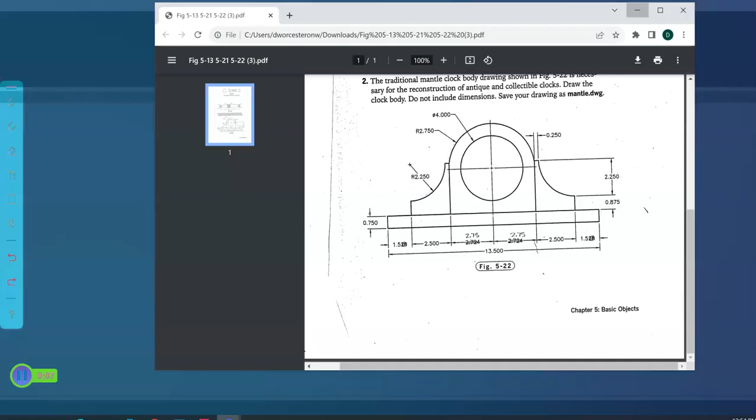Okay, for this drawing, we're going to be doing the 522 clock, and this is what your drawing looks like. So right here is the drawing of the clock. I did make a couple modifications on this drawing.

I've made this into 2.75 inches here, and one other one up here that's not on this but is in your book on page 63, where there's a ½ inch measurement. This line is a ½ inch above this center line. So those are the two little changes we made.

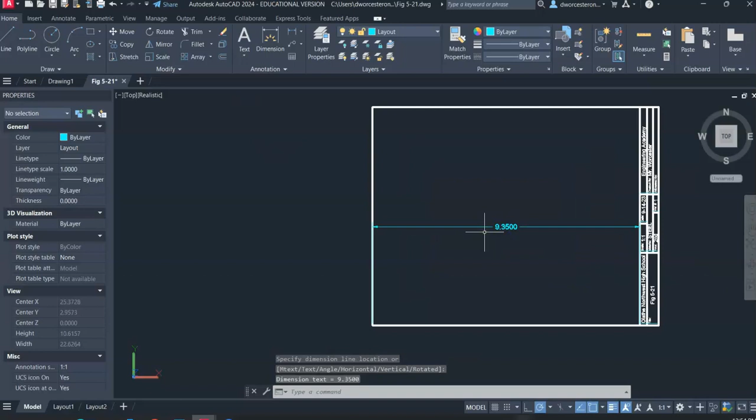The first thing we have to do is this clock is 13.5 units across, and my drawing space is 9.35 inches across, so the clock won't fit. So what we're going to do is scale the title block and border.

I just went SC for scale. I'm going to select the entire title block and border, and scale it from the base point of this bottom corner, making it twice as big, so I'll just type 2. Now the title block and border is twice as big, and my clock's going to fit out there no problem.

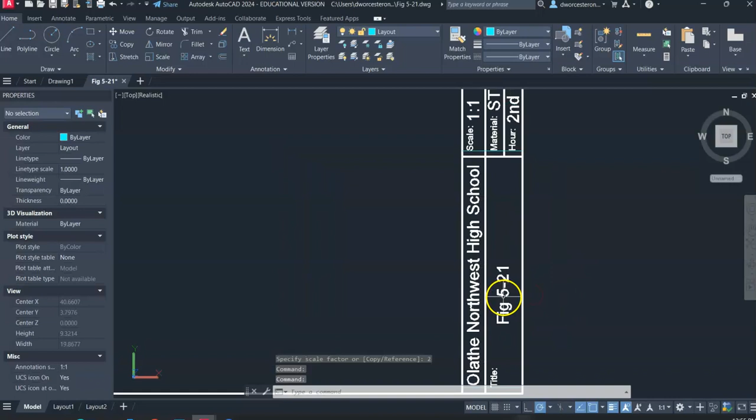The next thing I'm going to do is modify my title block and border a little bit. I just done the figure 521, so I'm just going to modify this into saying figure 522.

On the scale, since we scaled our title block twice as big, when we print this it's a little bit confusing, but it's going to be a 0.5 inch to 1 inch scale. So every ½ of an inch on the drawing when printed will equal 1 inch.

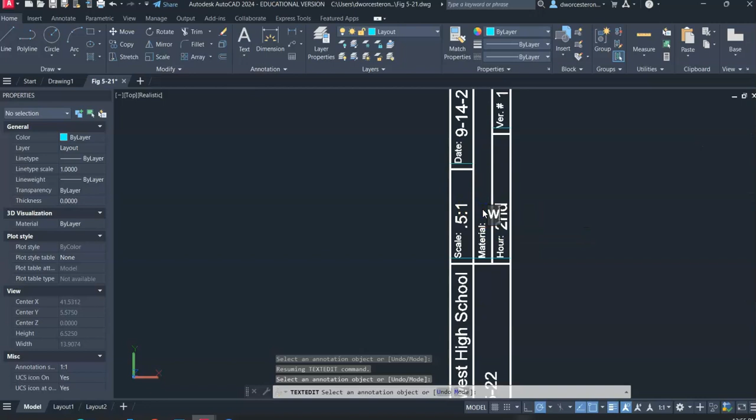Next, material is going to be wood. And then from there, set in the correct hour, the correct date, and your name if you don't have it in your title block and border yet. So there's all that.

Then now, look at this drawing. We're going to start it just the way I suggest you start every drawing. It has a circular part, so you're going to start it with a couple of center lines. So I'm on the layout layer.

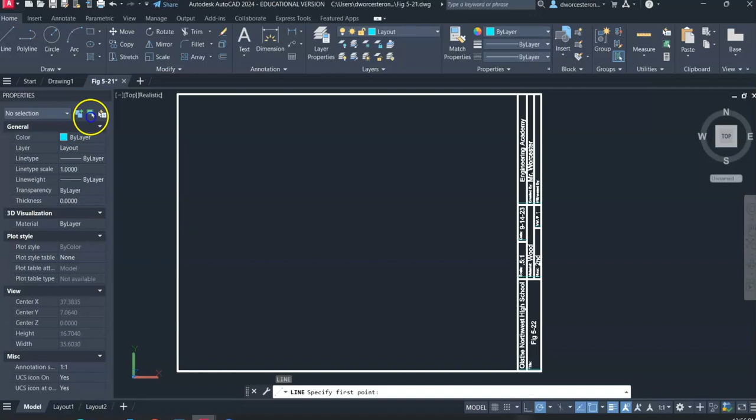I'm going to draw a center line from the left of the screen to the right of the screen there, and one from the top of the screen to the bottom of the screen there. Now we have our two center lines in there, looking great.

Then we're going to put two circles in there. A circle that goes to that intersection right there is where it starts. If you look at the book, it's a diameter of 4 for one circle. And then we're going to do another circle that has a radius of 2.75. That looks great.

Now what we're going to do is bring these two lines straight down off each side of these two corners. You could just go in there and make a line from that intersection straight down, but what I don't like about that is if you made this circle the wrong size by accident, that doesn't help you find your mistakes.

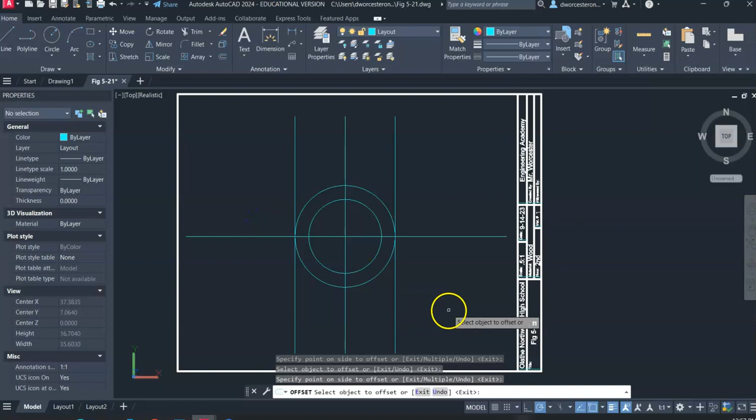So what I'd rather do is go O for offset, offset my 2.75 inches from this center line to the right 2.75 inches, and from the center line to the left, 2.75 inches. Now that has those two parallel lines in there. We can tell that looks pretty good, and everything's looking good.

Once you have those lines done, then our next thing I like to do is something I call lessen the confusion. Right now we have some extra lines out there, so I want to use the trim command. I'm just going to go TR for trim, enter.

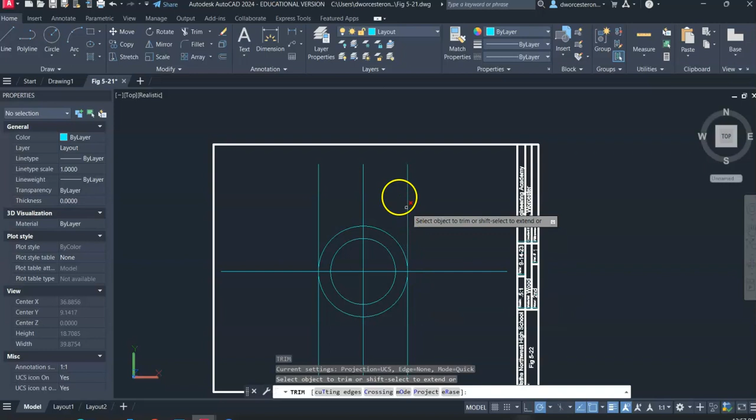I want to trim off this line up here. I can just go over there and click on it individually, or what I like better is dragging and clicking and holding, dragging my line across, making a line across there. That trimmed off that piece there and there on the top, and then trim off this piece of the circle there and there. So now I have that center little part of the clock arced up, looking beautiful.

All right, so now next what we're going to do is pull back up our drawing. On our drawing, what we're going to try to do is find this corner right here where this arc starts. So we're going to try to find that corner right there.

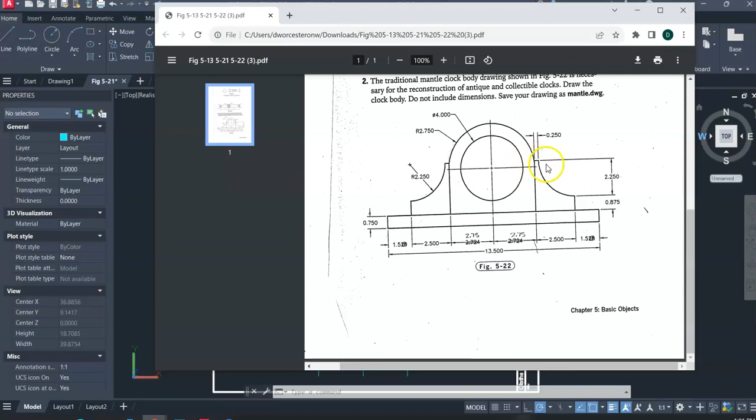If we look at it, they're only mentioning one of the dimensions, but from this center line up to here, it's 0.5 inches up. And then from that new line, it's 2.25 inches down to this corner. Let's take a look at that. It's also, I should say, 2.5 inches over. All right, a lot of little measurements there.

Let's take a look. So from this line, we just determined it was 2.5 inches over. So we're just going to use offset again. Offset 2.5, select this line and offset 2.5 to the right. And then pick this line over here and offset 2.5 to the left.

Okay, so those two lines are offset. Now next, I need this next little line that was up here a little ways. Looking at our drawing, that line is a half inch up, so I'm going to offset 0.5 above this center line. I'll select this center line and offset it up 0.5. That gave me a new line there.

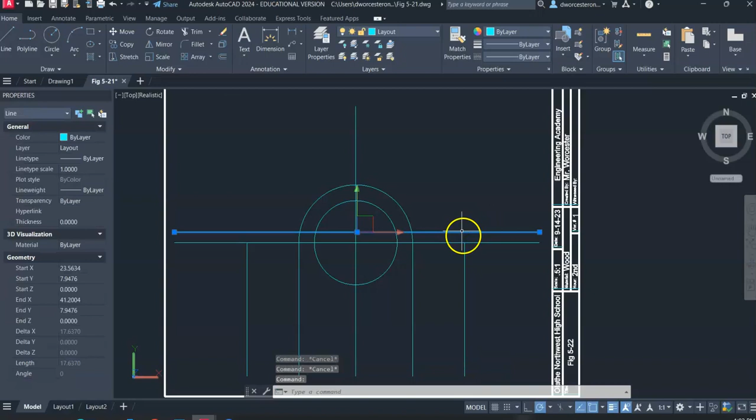Looking at the handout, from this line down it's 2.25, so I'm going to offset 2.25 to right there. That's got us there, and we'll take a look at that in just a moment. I know this is getting to be a lot of lines and it starts to get a little confusing, but just bear with me for a second.

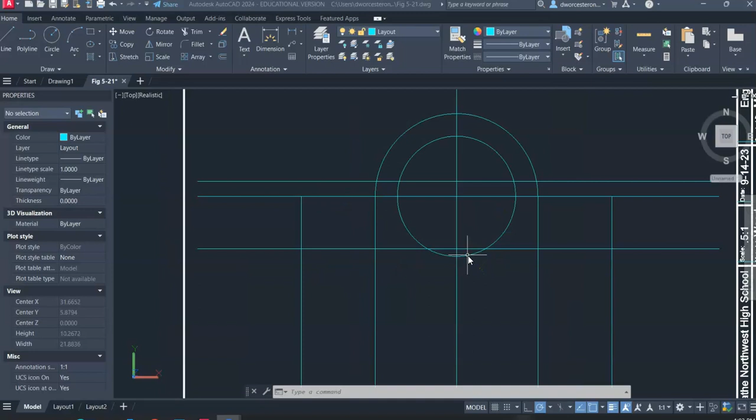Just a couple more steps and we're going to get those lines in and make it look a lot nicer. So our next step is this line right here that we just offset over 2.25 inches. That line, I need to stretch it up to where it intersects right up here. We'll see why we do that in just a second. So pull it straight up to that intersection right there, and that looks beautiful.

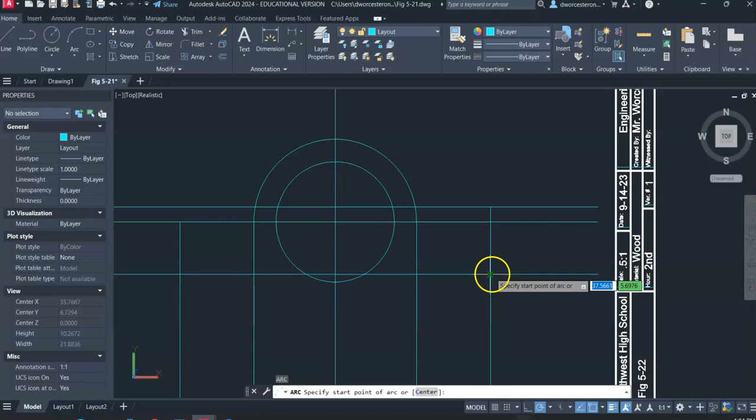Now with this, you can't just come in here and randomly draw an arc in that looks like this and say, yep, that looks pretty good. Because if we check the size of that arc, double click on it, that arc has a radius of 2.7637. If we look at our book, that arc should be a radius of 2.25. If you go to manufacture this, 2.76 is a lot different than 2.25. It's not going to be correct, so we can't do it that way.

So what we do instead is this: I just drew this line up to here, to that intersection. I'm going to select a circle, and make a circle go to that intersection there with a radius of 2.25. Once that's in there, then again, like I said before, to lessen the confusion, we're going to trim it out.

This part of the top, we don't need this part of the circle on the top, so get rid of it. I don't need this whole part over here or this part here. I'm trying to create this little end here, so I really don't need this anymore. I do want to leave my center line because I'll use that center line later, but I don't need these two chunks over here.

So now that is nice and trimmed up, makes this nice little piece here that looks just like our handout. Looks just like that, going up and over. We're going to work on the rest of that in the next step.

Okay, so we've got that. Now, if you totally got lost and confused on that half, that's okay, because guess what? We have another side to do too. So follow with me on this side, and maybe you'll catch it on this side.

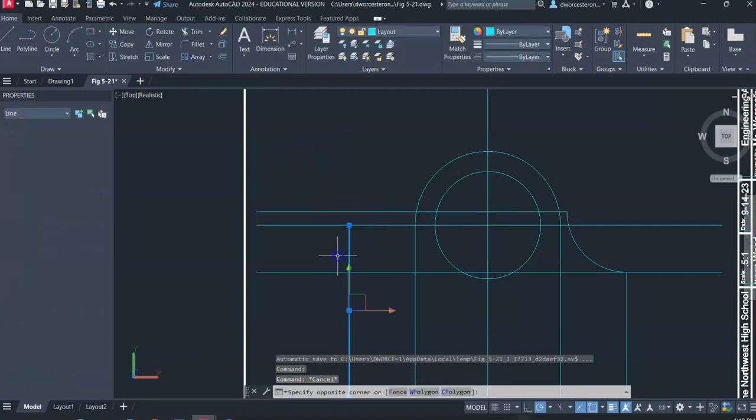So the first thing we're going to do is grab this line. What did I do the first time on this line? What did I do with it? I dragged it up to there, correct. Yes, I drove it right up to there to that top line. Then I went C for circle, came to that end point or intersection, and I drew that 2.25 inch circle. Went to there like that.

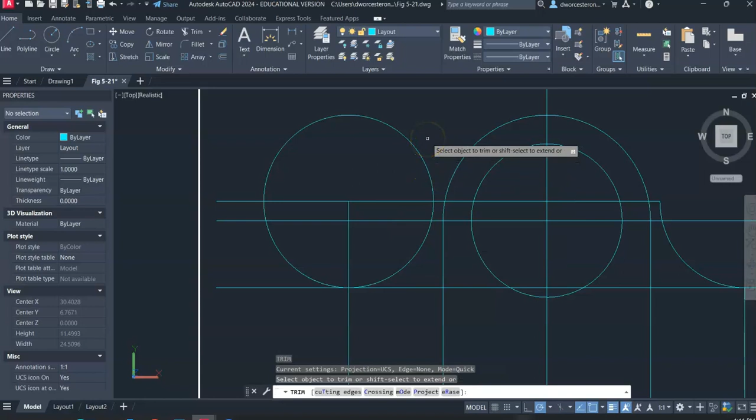Once that circle's in there, then we trimmed up, went trim, and started to get rid of the things we don't need anymore. I don't need this circle up here on the top, so I got rid of it there. Don't need this line anymore over here, so I got rid of it there. Don't need that one there.

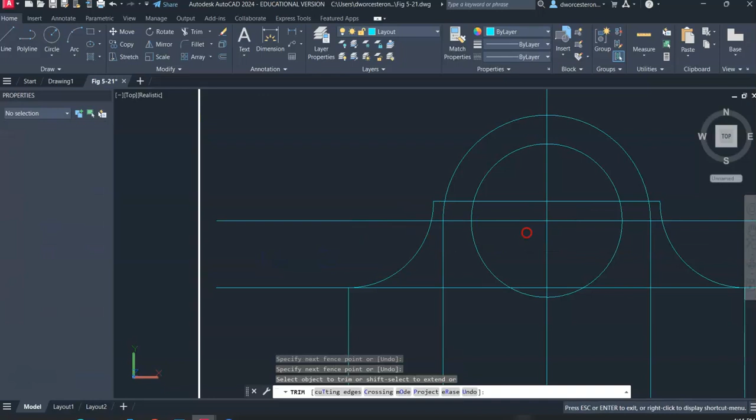I am going to leave the center line again, like I mentioned before. Going to leave the center line, but I don't need that over there, don't need that piece there, don't need this here. Again, leaving that center line in there. Now that I got it like that, I really don't need this line that goes across here, so I can get rid of that one, and that one, and that one, and that one.

And there, I'm starting to take shape of this clock pretty good. It's looking a lot like your little handout right there, of this clock down to that corner.

Okay, so now what we're going to do is put the base of this clock on here. So a little base. If I look over here, how far below this little arc does that base start? What's the measurement over there?

0.875. So we're going to go O for offset again, since we use offset a lot. O, 0.875, enter. We're going to offset... there we go. Click on that line and go below at 0.875.

Then next, what's the thickness of this base? It tells you over here on the left-hand side how thick that base is. 0.75. So we're going to go O for offset, 0.75, and offset down 0.75. So that's got your base in here.

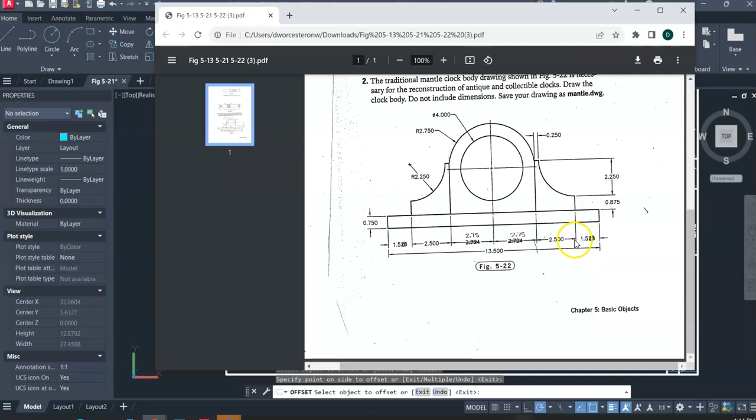Now one other thing you got to look at is this: how far over does it go here to this base over here from that line? It goes over another 1.526 inches. So we're going to go offset 1.526 on the outside there, and on the outside over there.

Okay, so now we're really basically to the end of this drawing. We just need to trim it up a bunch. So for example, this line here we don't need anymore, because that was just a line showing us on finding that corner. So we can just erase that out entirely. I'm just going to go E and erase that line out.

Now what I need to do is trim it up. I try to use trim very efficiently, so I go TR for trim. Here I need to trim off this entire corner of it. Remember, if you click and hold here and trim it down and around, I can trim all that end of it up, and it's all gone. If I come over here to this side, watch again for a couple seconds: trim, click around there, and it trims all those off.

I now need to trim all those off, so I'm just going to put a line across that, and I need to trim all of that off and put a line across that. So that was really quick in trimming.

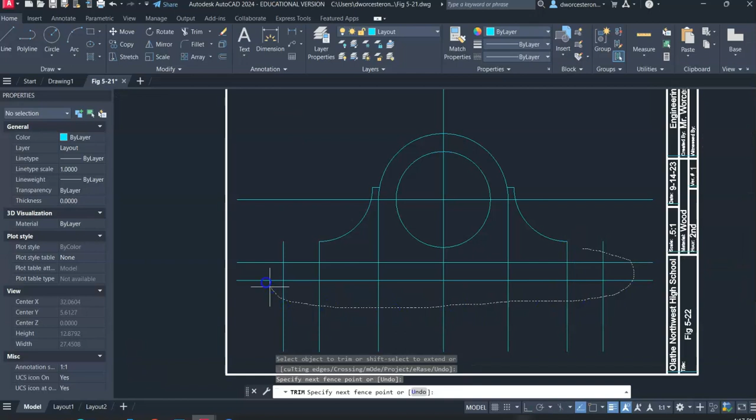Now I'm going to go ahead and undo that, and show you another way you can do that. If you really want to be efficient, you can go trim, and just watch. I come over here, I trim, and go around all these things all the way over to there. That's one trimming, bam, knocked all that stuff off. Then draw a line right across there, bam, trimmed all that off. All your trimming is done that quickly, that easily.

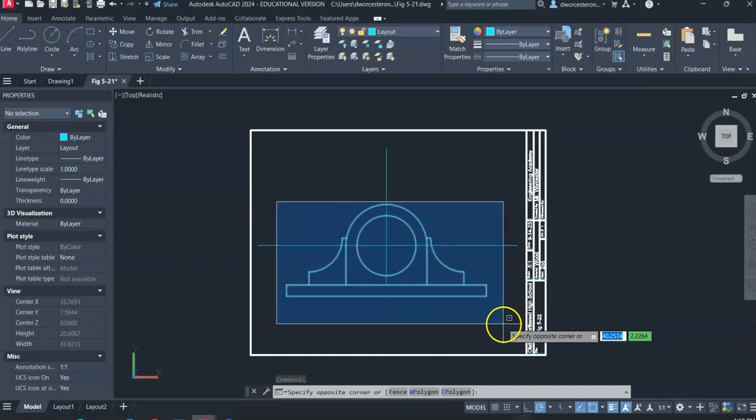All right, so last thing, just the same as what we did on our last drawing, the clock itself: I'm going to select all that here with my grips. All of that part of the clock is the object, so I'm going to change that to the object lines layer.

These other two lines are center lines, so I'm going to select those and change those to the center lines layer. If you remember from last time, the center lines just extend out past the object a little bit, so I'm going to come into here.

Here it's eeny, meeny, miny, mo - you can either make it go right to that point, or just outside the circle. I honestly just do it outside the circle typically. So to there - that one pulled over right to there. This one I pull down to about here, right above that outside circle. This one I do a little bit differently - I pull it right down below that base right there.

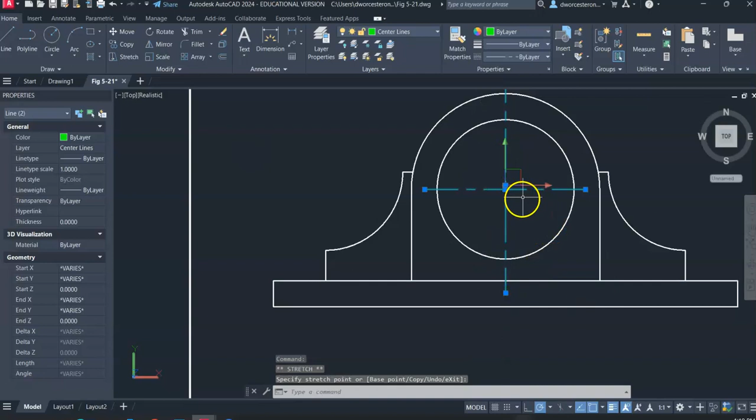The reason for that is it makes it a little bit nicer to get these lines centered up. So I grab this grip, pull it down to the center there, grab this grip, pull it over, and that makes it really nice and centered and beautiful. That right there is the drawing complete.

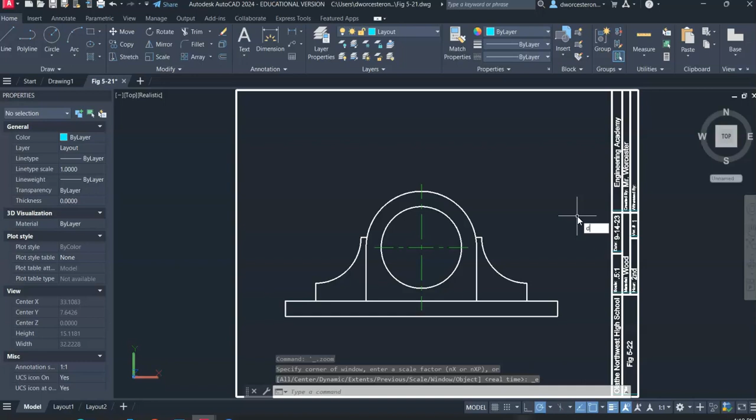You're once again going to double click your middle mouse button to get it centered up nicely. You're going to save this as figure 5-22 in the activity folder.

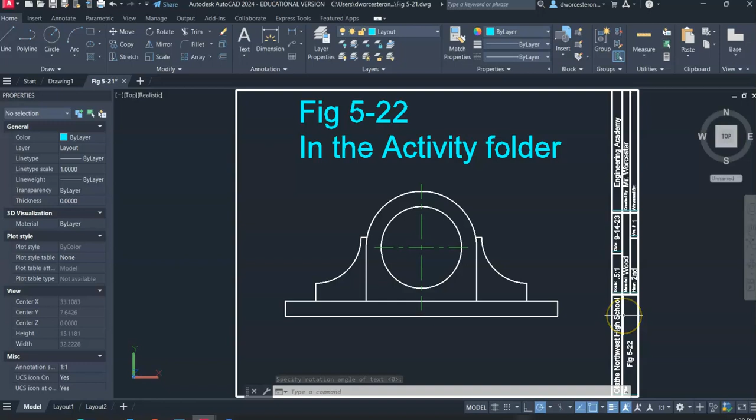Once again, when you do your snipping, make sure that the title block and border is clear. If it's not, you have to do 2 snippings of it to make it clear, but you should be able to get it clear. It looks just fine on my screen, so I'm assuming it'll look fine on yours also. I do have a little bit higher resolution on my screen than you guys do, but I still think it'll look fine. So there you go. Good luck.